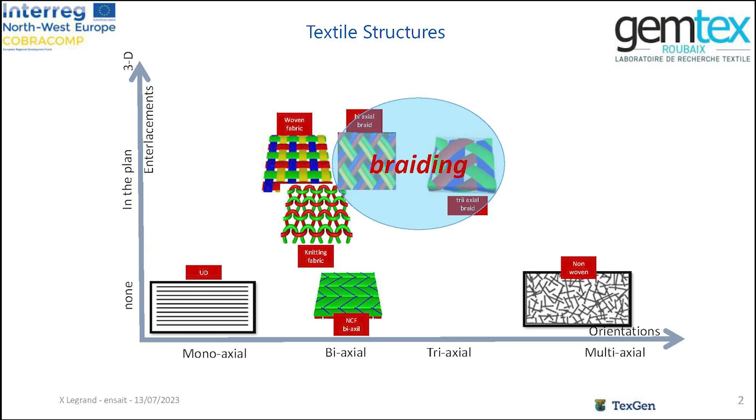I'd like to add that braiding is a very old technology. In fact, I used to say that braiding is the second job in humanity's life. The first one you already know, twisting technology. The aim is structuring the textile, and the idea is to interlace any kind of products like roving, ribbon, wire, or strand.

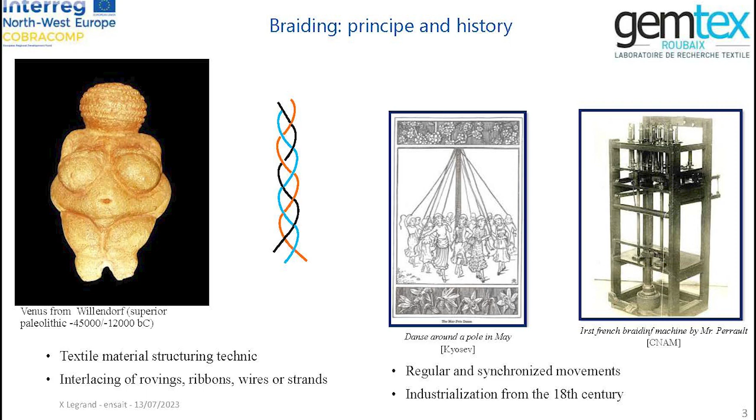It was also a very popular dance in May. They used to put a pole in the center of the village and dance around the pole, and this would make a braid. The first French braiding machine was made by Mr. Perrault in the middle of the 18th century.

What is braiding? You've got a lovely braiding machine on the screen, a Herzog one, about 2 meters in diameter. You have to make the wires dance around the center of the machine that way, as you can see with the blue and red points, which are bobbins. This is moving using the horn gear here.

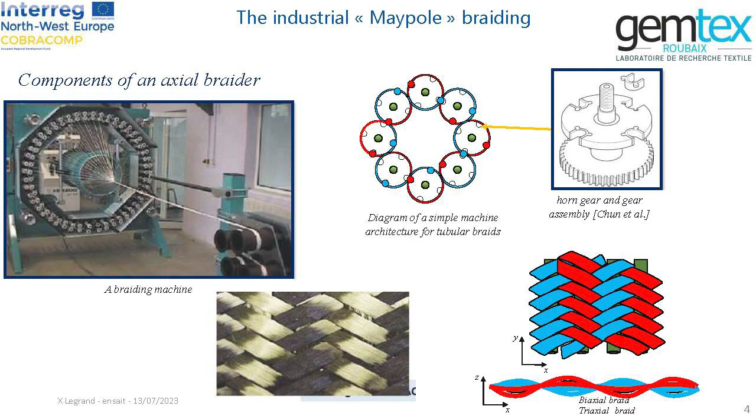And then you get a biaxial braid like that one. And if you put some yarn in the center, then you can get a triaxial braid, like it's illustrated here in carbon. Okay, so very easy technology, isn't it?

Georges Cahuzac, when he proposed the solution, being a clever guy, analyzed these structures. As you see, the bias yarn and the axial yarn - here we get 3 yarns in the thickness, but sometimes only 2 or only 1, which means that the global braid is not homogeneous on the surface.

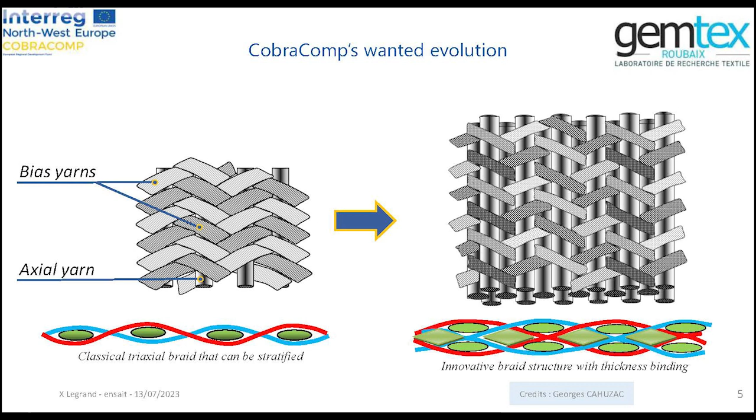So he proposed this kind of architecture, this particular pattern. As you can see, everywhere you look in the thickness, you get 6 yarns - 1, 2, 3, 4, 5, 6, everywhere. So the objective of Georges Cahuzac was to make a special structure to get better homogeneity. It's patented, and his objective was to achieve high axial resistance for the composite.

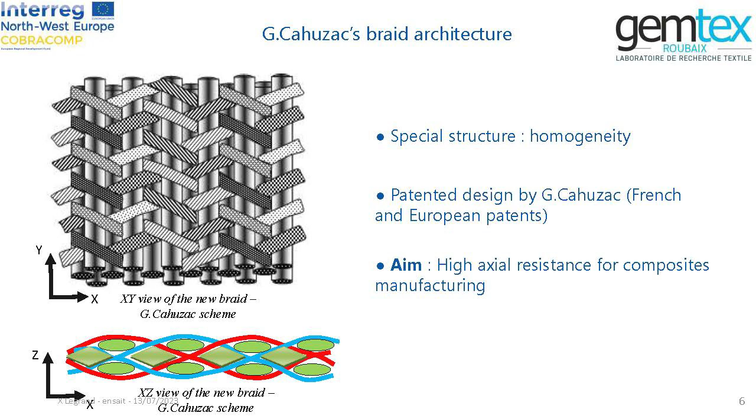The top of the sample we made with the new braid architecture. We then decided to make a geometrical model using TexGen, so we got several parameters in order to set the final geometry.

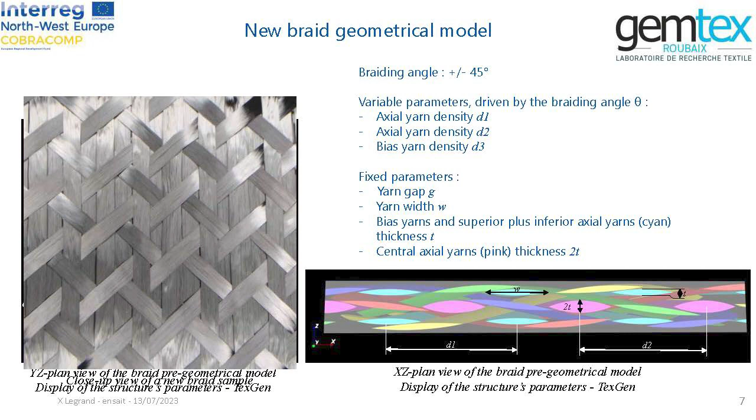This is a model, only a model. Why do we do that? In order to be able to put it into finite element software and compute mechanical properties to predict them. So this is the basic diagram, and then we got this 3D representation with easy yarn geometry - it's nearly flat yarn.

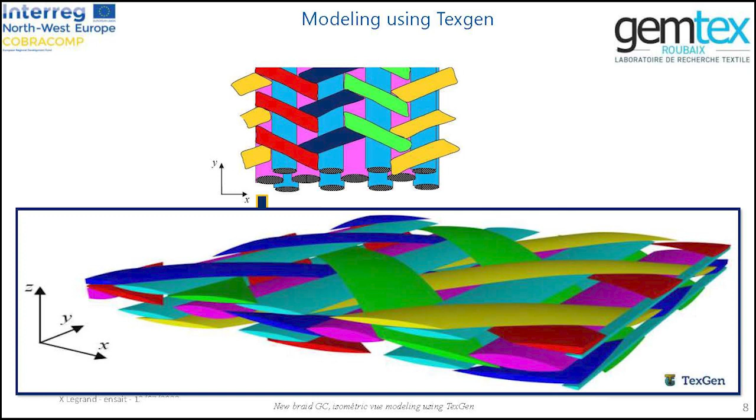And so you can see the 0 degree yarn in blue, light blue, the plus/minus 45 degree yarn in green and red, and blue and yellow, crossing and interlocking into the thickness.

This kind of work helps us improve our model, and then we're going to put it into Abaqus software as soon as possible.

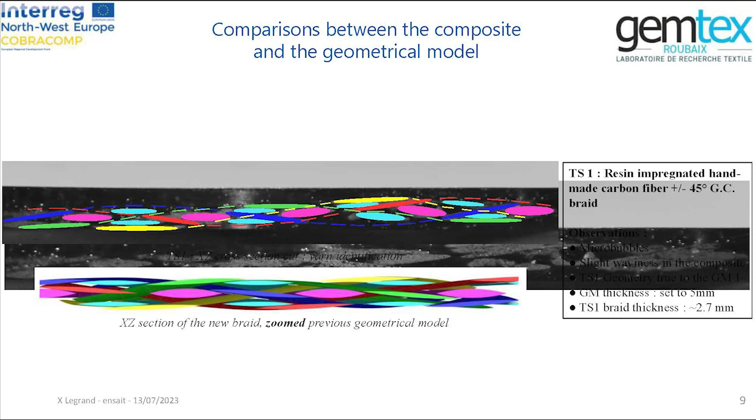In order to predict the mechanical property of such a structure, we decided first to use the classical laminate theory. And first of all, we make a test of compaction.

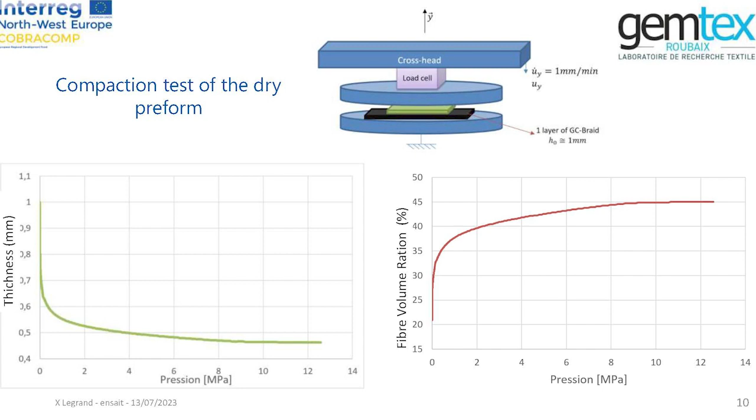Using this kind of graph, we can apply classical laminate theory. So we define the yarn used, the resin, and then using the CLT theory, we are able to predict the mechanical property of the braid.

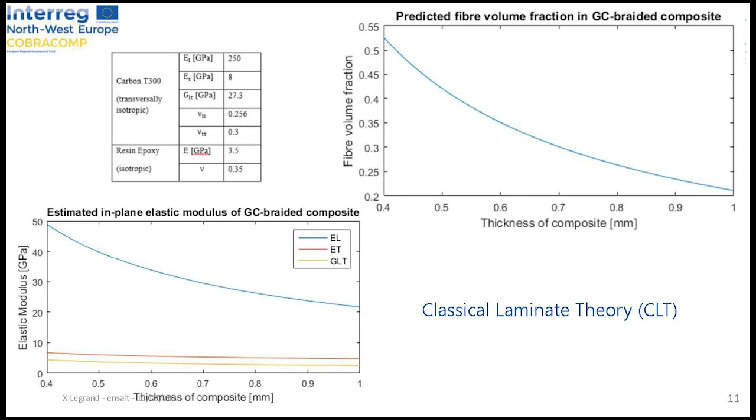This has to be improved using finite element analysis. So we've seen already why we make this special braiding pattern, and the mechanical property we can expect.

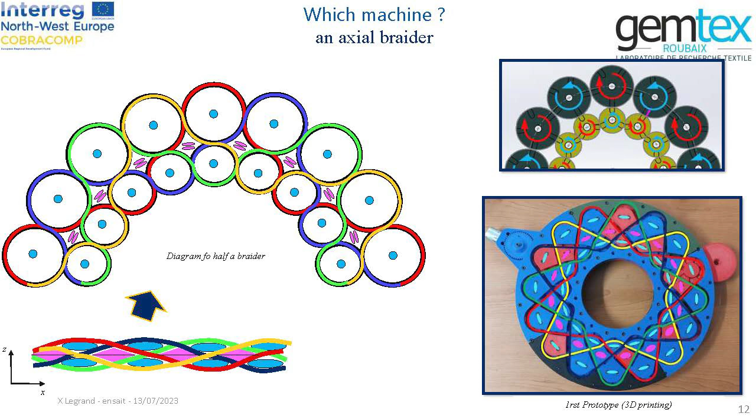According to this kinematic, we can get the original pattern designed by George Cusack. So first of all, we prove the possibility to make such a kinematic by 3D printing a prototype, and this is the video.

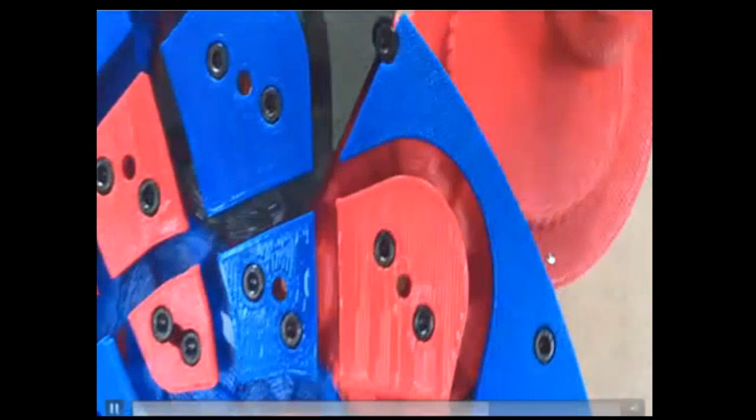So, as you can follow with the zoom, this video just proves the capability of such a machine to ensure the good kinematic of the bobbin.

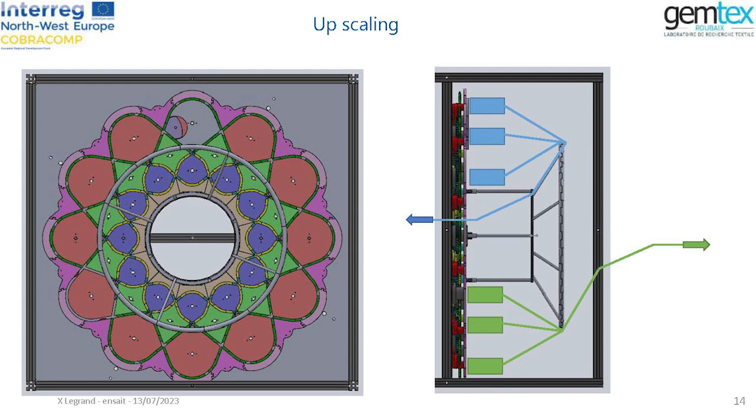So if you proceed in that direction, then the yarn will follow this way. And if you proceed in this direction, then the yarn will follow this kind of path. So this is the 3D representation, 3D design of this kind of machine.